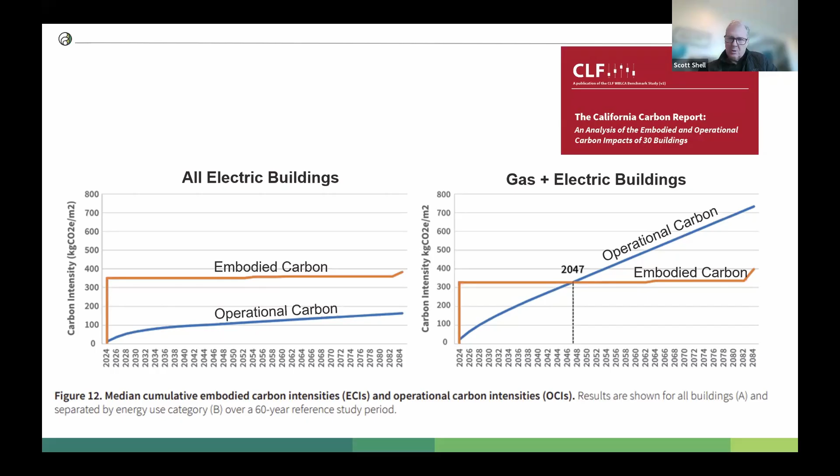So realizing this about 4 years ago, I decided to shift from a focus on architecture in general and a lot of operational carbon, specifically to the building material world. And I moved over to ClimateWorks, to the heavy industry program. So heavy industry is responsible for fully 1/3 of all global greenhouse gas emissions.

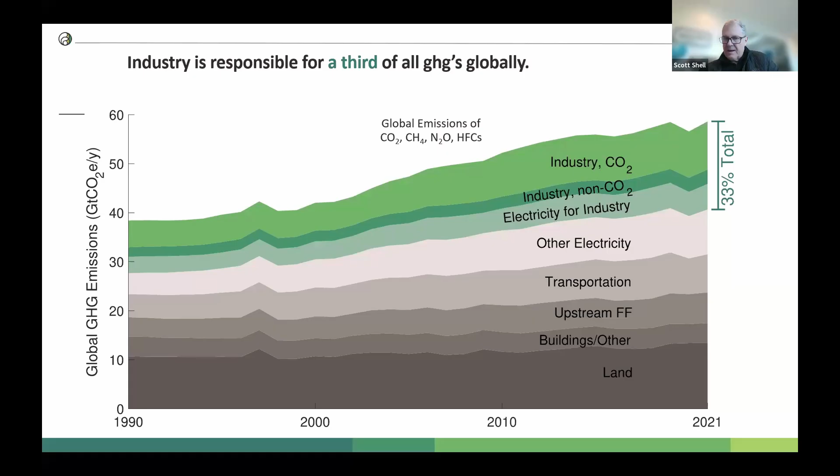It's shockingly large. Compare that to transportation down below. All forms of transportation is much smaller. It just hasn't gotten as much discussion because people thought maybe we don't know how to do it. But we actually do know how to do it, and it's time to get on with it.

Heavy industry is concentrated in a few very large sectors. Cement, steel, and chemicals are the primary sectors that we work on. When I say we, I mean both the ClimateWorks Foundation and Global Industry Hub. These are philanthropies that support other organizations to decarbonize these industries. Just cement alone is about 8% of all global CO2 emissions, almost as much as all passenger vehicles in the world. This one sector.

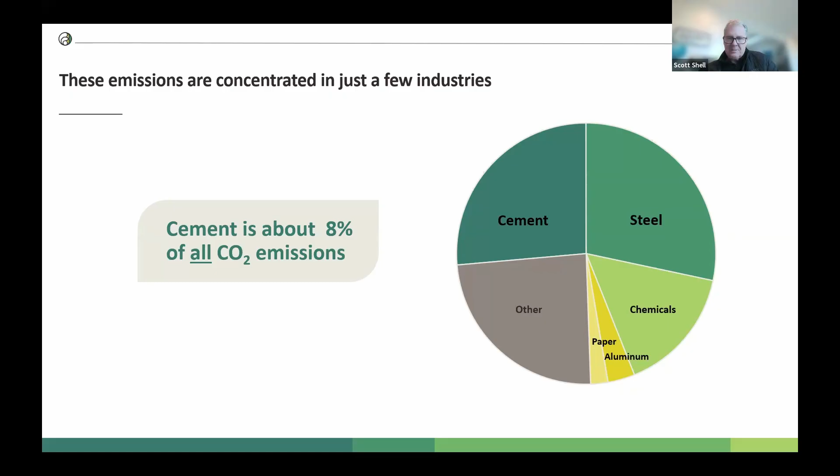So to understand how to decarbonize it, we first have to understand how cement and concrete are made. So concrete is the material that you see and that we build things out of, the sidewalks and buildings and so forth. Concrete is like Rice Krispie treats. It's a combination of aggregates and cement. Cement is like marshmallow. It holds the aggregates, the Rice Krispies, together.

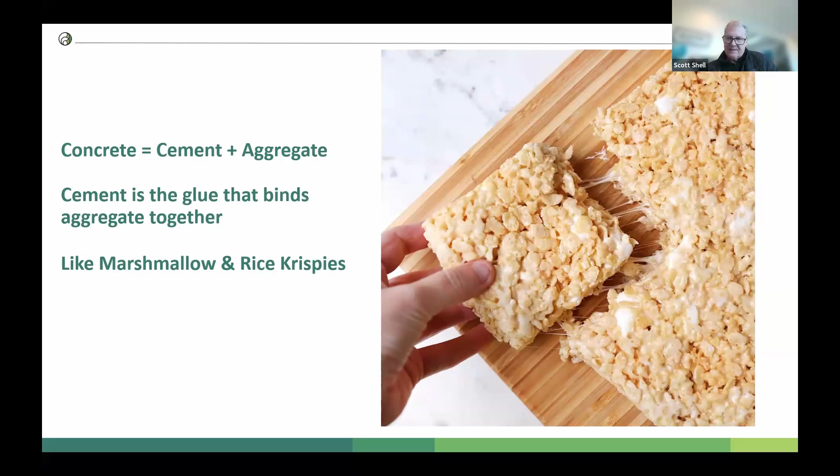This is a typical mix design for concrete. It's about half coarse aggregate, maybe 3/4 inch aggregate, and then quite a bit of sand and about 10 to 15% cement. So cement isn't that large a portion of the concrete, but it is responsible for almost 90% of the carbon emissions. So this is an area where we're really going to concentrate our efforts.

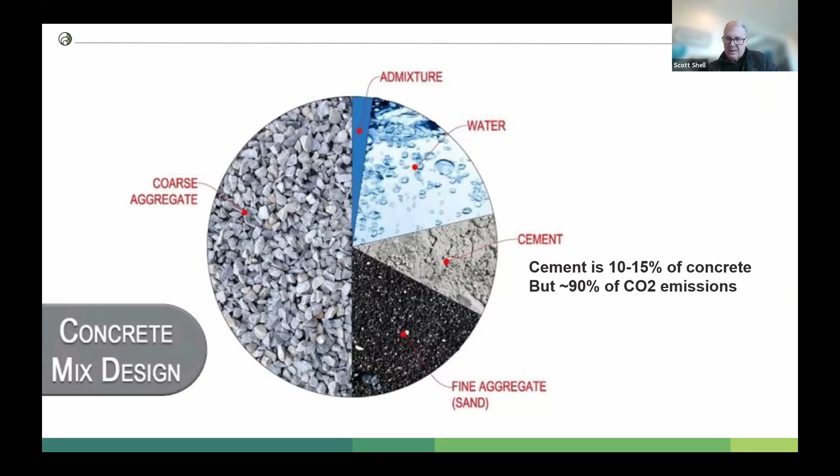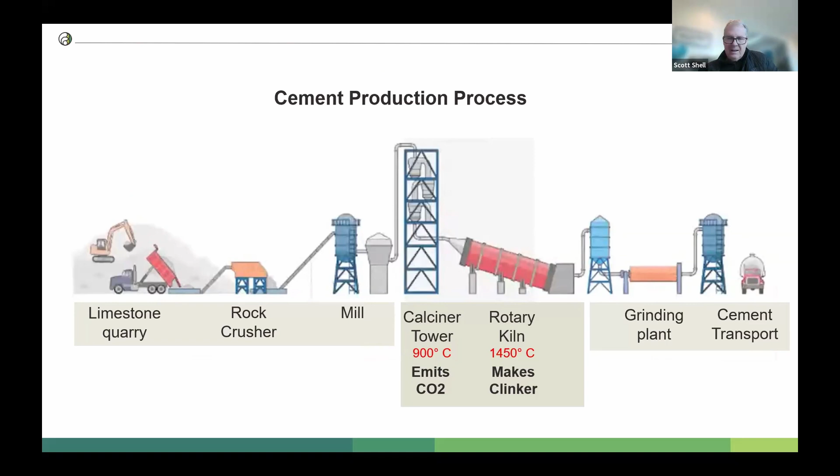So to make cement, you dig up limestone, you crush it, you mill it, you put it in a calciner tower and heat it up to about 900 degrees centigrade. That creates a calcination process, a chemical process that emits CO2. You then put that in a rotary kiln at 1450 degrees C, and that makes clinker. You grind up that clinker, and that makes cement.

So here is that process in photos. Cement plants are typically located next to a limestone quarry because they use millions of tons of it. This is the Cupertino quarry and cement plant, now closed, near Stanford.

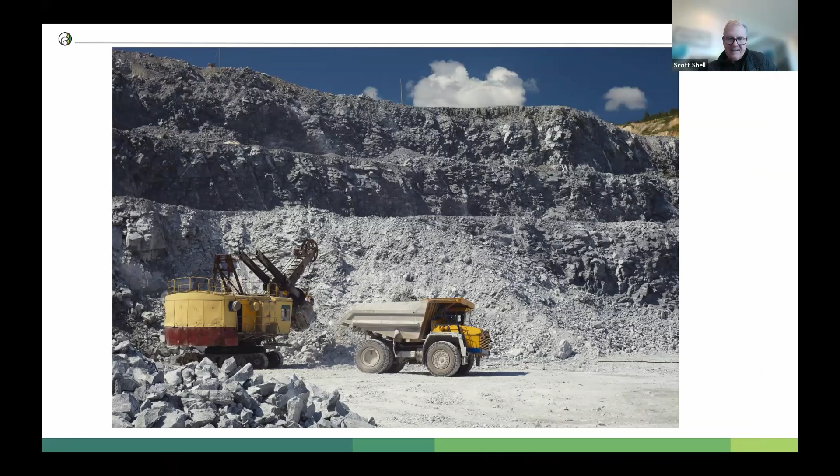They drill a bunch of holes, insert explosives, blast that. They then dig up those rocks, put it in a dump truck, take that over to a crusher, crush that up into smaller rocks. Those smaller rocks go into a grinding mill, in this case, a ball mill that's full of steel balls, and they grind up those rocks, those limestone rocks, into a fine powder like flour.

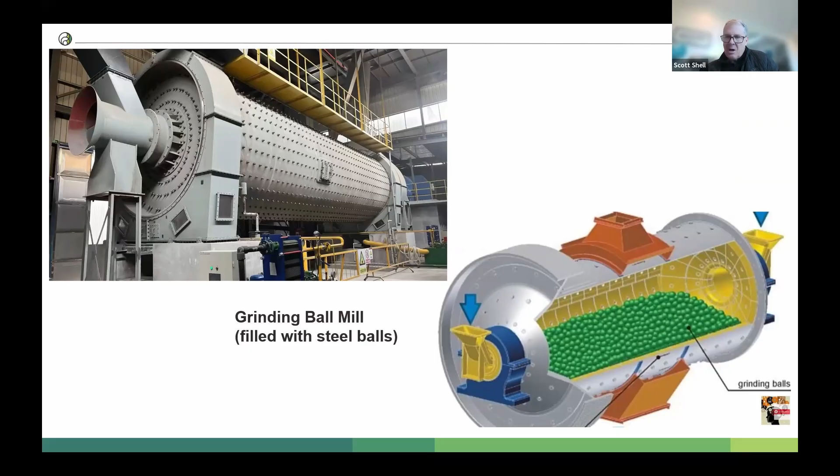That's called raw meal. That fine powder is then put in the calciner tower. This is the tall thing you're seeing here. It has a series of cyclones, and that fine powder is swirled around, and super hot air flows through that and heats up all of that limestone raw meal to create this calcination, this chemical conversion of that material.

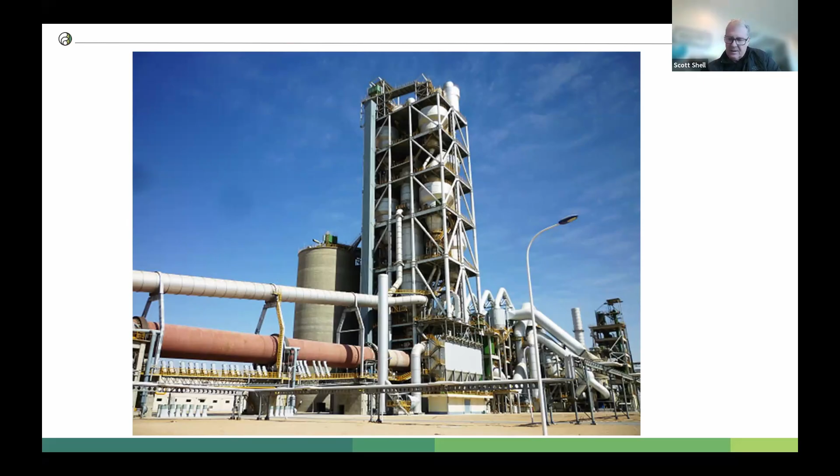That material then goes into this brown round tube, the rotary kiln that you see going off to the left. It is sloping down and to the left, and that raw meal flows through it and turns into clinker as it's formed. This is the end of that kiln. These are big things, maybe 10 or 12 feet in diameter, so you could drive a car through it. And they have an enormous burner to get this material up to these very high temperatures, much hotter than lava.

Most of the fuel for that is powdered coal or powdered pet coke, so very, very high carbon fuels. And then the clinker spills out of the bottom of the kiln there, which you see.

So you see the clinker here on the left, it's kind of these rock-like nodules. You then have to grind that clinker again to a very fine powder to make cement. You can do that in a ball mill like we saw earlier, or you can do it in a vertical mill as shown here, which is much more energy efficient.

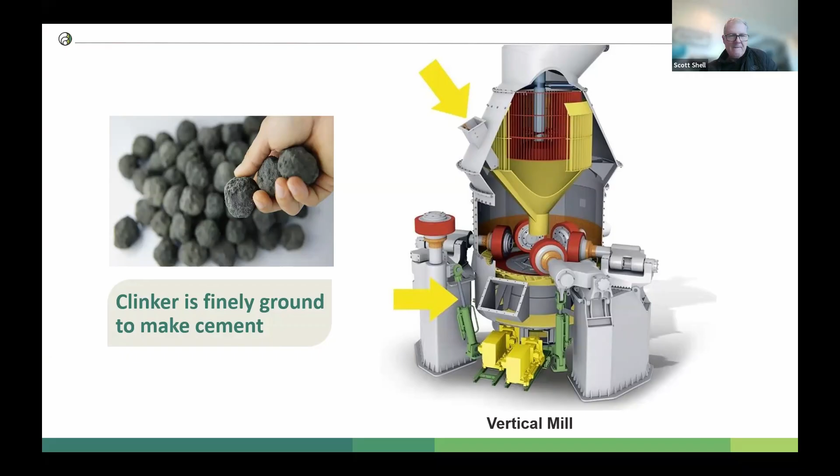Cement is made on a huge scale. A typical cement plant is 1 million tons a year or more. So that's 100 trucks like the one you see here every day. It is a big logistics business. And if you want to change it, you have to be able to work at that scale.

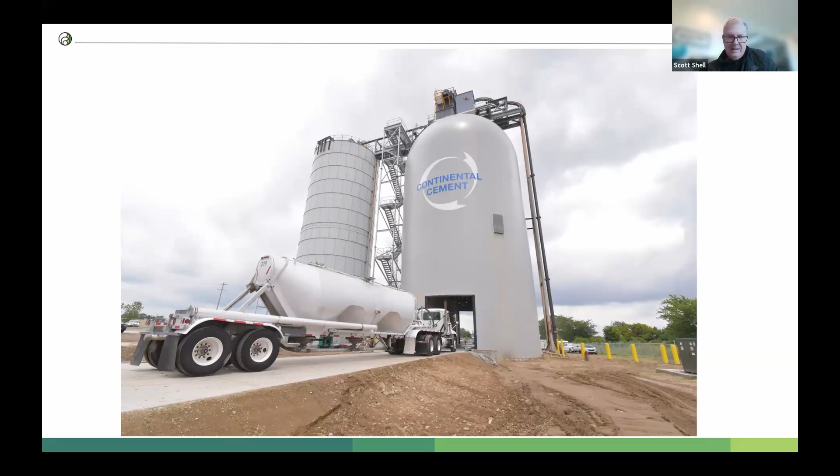So where does all the CO2 come from? You see here the CO2 numbers associated with each step of that manufacturing process. You might think it's all that mining and transportation, but no, it's actually this calcination process in the preheater and all the fossil fuel used.

Limestone is calcium carbonate. When you calcine it, it splits into lime and CO2. Almost half of the weight of that limestone is released as carbon dioxide. So picture that big old dump truck full of rocks: almost half of that weight is released as CO2 in that calciner tower. And then there's a lot of fossil fuel to get up to these very high temperatures, so that's also a very large contributor. This process emission, this chemical conversion, is over half of it. The fossil fuels are the next bit.

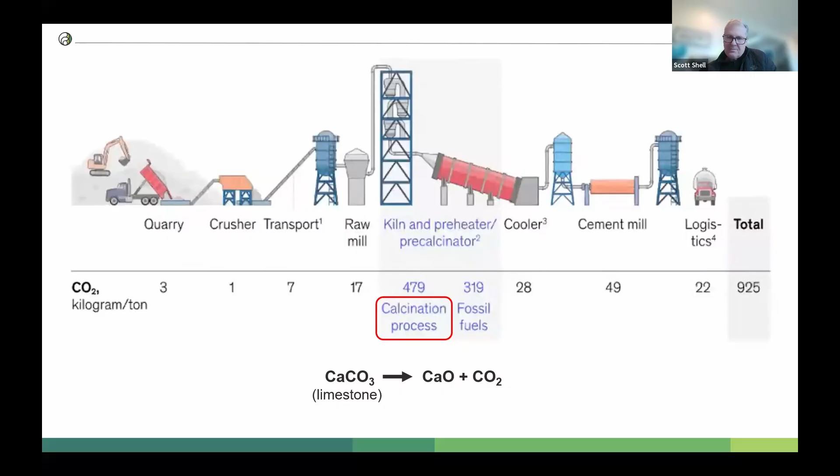The key thing is not that it's that carbon intensive as a material, it's that we use so darn much of it. We produce more concrete than any other material globally, about 30 billion tons of concrete per year. That's about 8,000 pounds for each one of us. Every person in the world consumes about 8,000 pounds of concrete per year, an astonishing number.

If you compare that to lumber, we produce less than 1 billion tons of lumber a year. So we're convinced there's no other material that can replace concrete as a building material, just because nothing else is available at this scale. So if we have to use it, how do we decarbonize it?

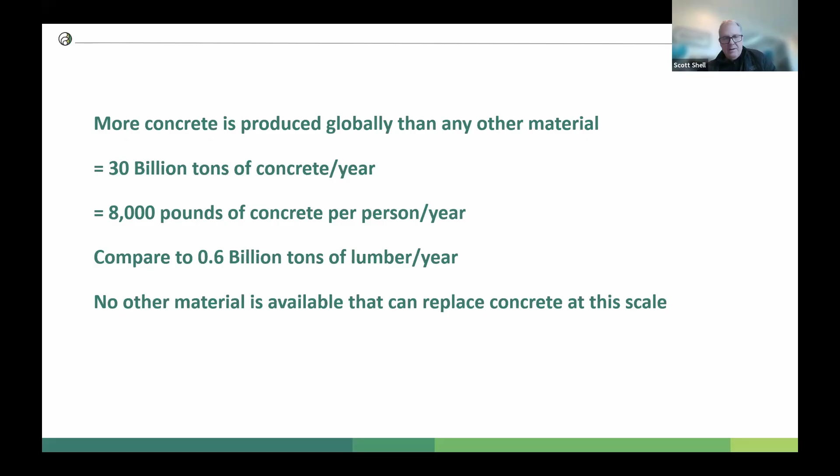So there's lots of roadmaps out there that describe pathways for decarbonizing cement. This is the roadmap from the Global Cement and Concrete Association, and they stack up a number of different strategies. The top one, the light green, is designing more efficient use of cement and concrete in our buildings. The next one is efficiency in concrete production, especially things like using mechanical mixers instead of mixing by hand. The next one, the light orange, is the one we're going to talk about mostly today: savings in cement and binders. This is using less clinker.

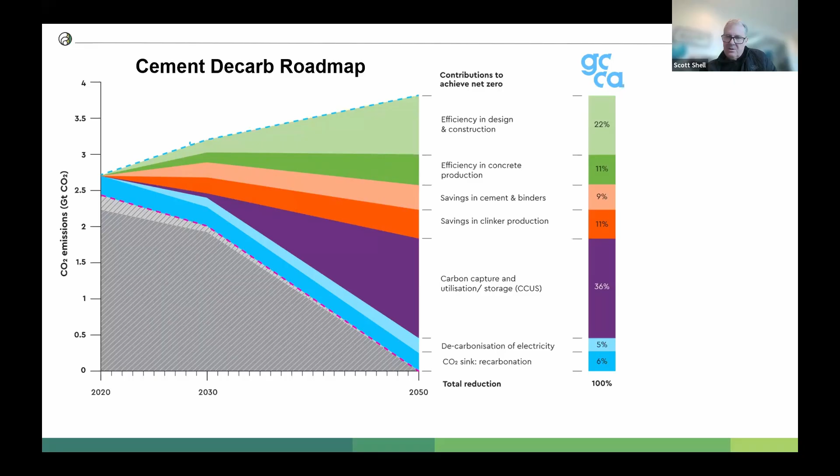The next one is basically energy efficiency, and then carbon capture. The carbon capture one, the purple one, is large here, but in our view it's by far the most expensive. So we want to shrink that down as the last strategy we use, and use all the other strategies that are more cost effective first.

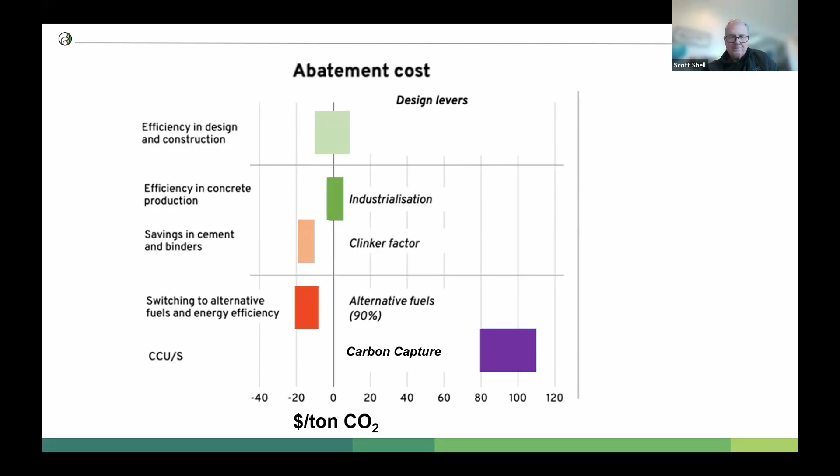What that means is ordinary Portland cement is mostly made with clinker, and you can replace some of that clinker with something called supplementary cementitious materials, SCMs.

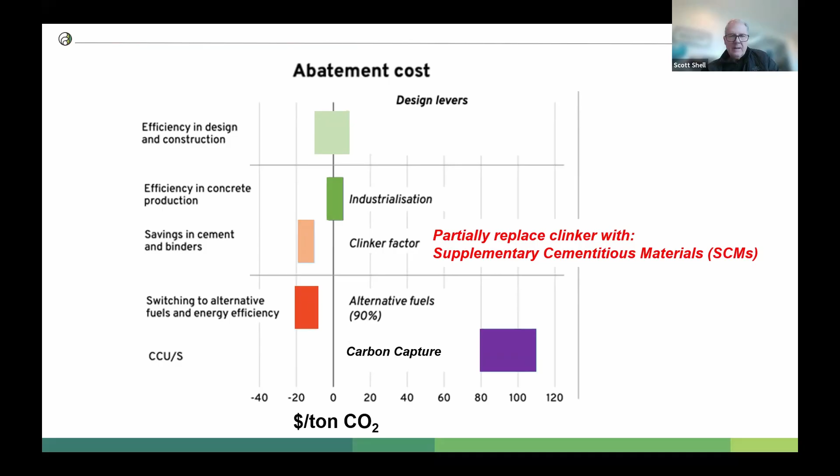The SCMs that you hear mostly about are fly ash and slag. Both of these are dependent on coal power. Fly ash is the ash emitted from generating electricity from coal power plants, and slag is a byproduct of producing steel in a blast furnace.

So these materials work well as SCMs, but they are from coal, and we are phasing out those coal industries. We're working hard to get rid of those, and so those materials are declining. In fact, it's already getting hard to get some of these materials.

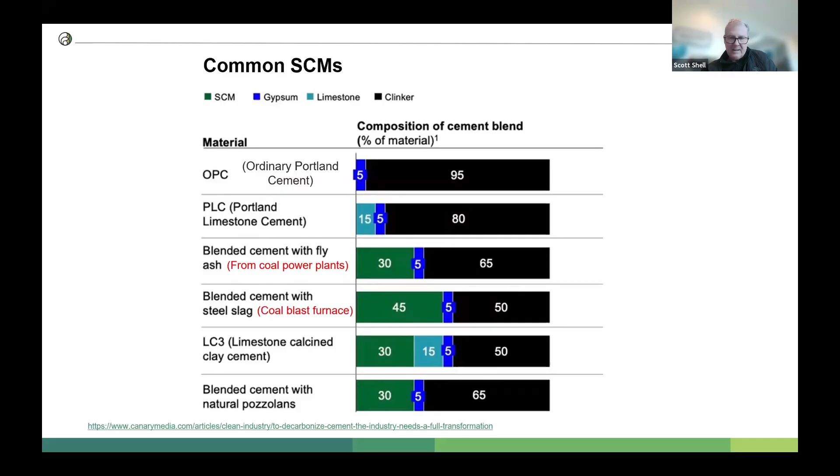There's another challenge with these SCMs: they're just not available in large enough quantities. We make over 4 billion tons of Portland cement globally every year, and there's only about 8% or 10% as much fly ash or slag as there is cement. So it can never replace Portland cement or clinker at a high level on a global basis in those blended cements.

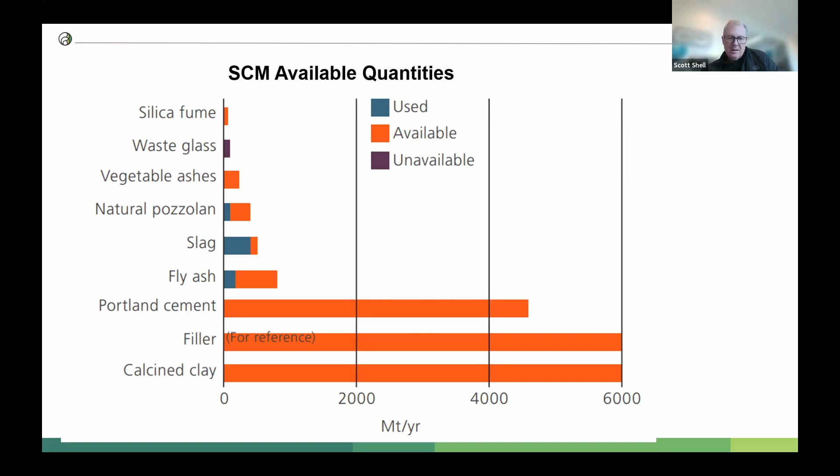The bottom line, however, you'll see calcined clay. Clay is one of the most common minerals on earth. It's broadly available around the world, so it's near where you need it. We think that is the globally scalable solution. Now, we still support using these other ones while we have them, but we need to prepare for the future and for today, where we can get to much higher clinker replacement levels with these supplementary cementitious materials.

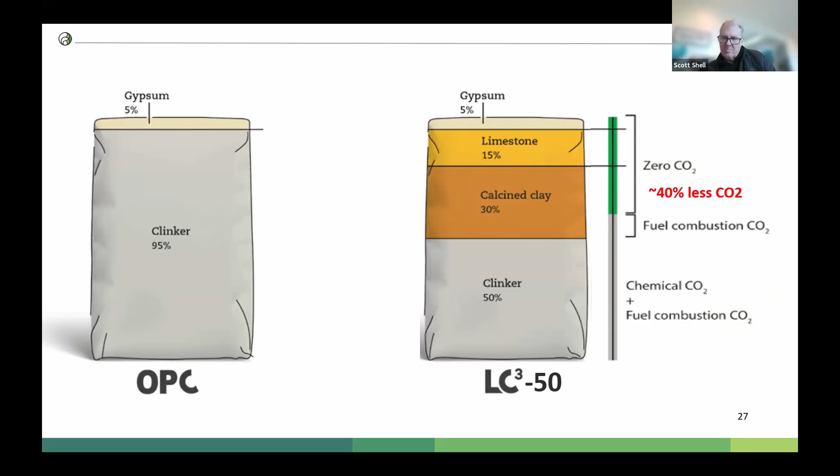Now, this is not limestone that goes through the kiln, it's just ground up, so it's very low carbon. In both of them, there's about 5% gypsum added to control the set time. With LC350, there's still some fuel used to calcine the clay, so instead of getting a 50% reduction, you get about a 40% reduction in CO2 emissions.

There is, however, continued progress on increasing the amount of calcined clay and lowering the clinker content. LC335, with 35% clinker, is now a code-approved material in some jurisdictions and is being produced in a few plants globally. So this is really driving down the carbon emissions of this blended cement.

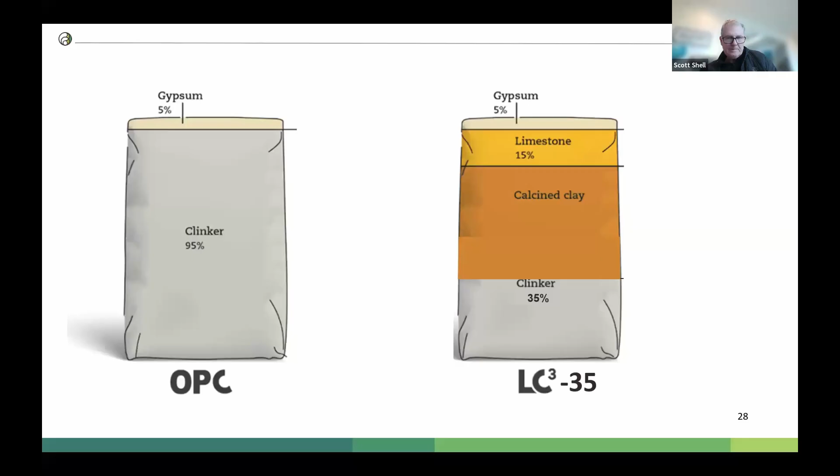You calcine clay at a much lower temperature, about 800 degrees, than clinker, which is about 1450 degrees. So your fuel costs go way down, about a third the cost of the cement, making the calcined clay much more affordable to produce. Retrofitting existing kilns is one of the most cost-effective ways to produce a plant. There are actually quite a few excess kilns around the world, with a lot of excess cement production capacity in China, Southeast Asia, and some other places, so there are kilns that could be retrofit to produce this.

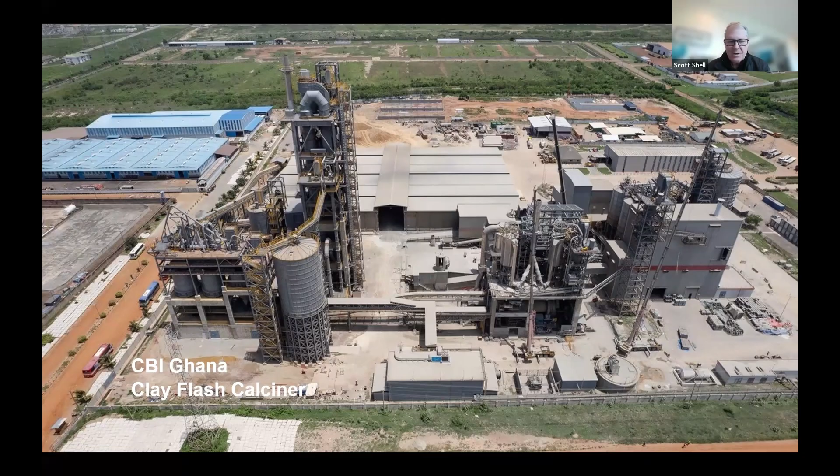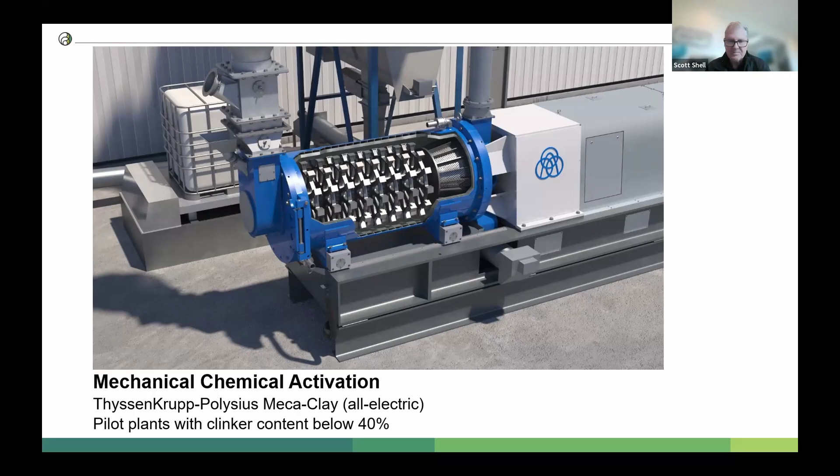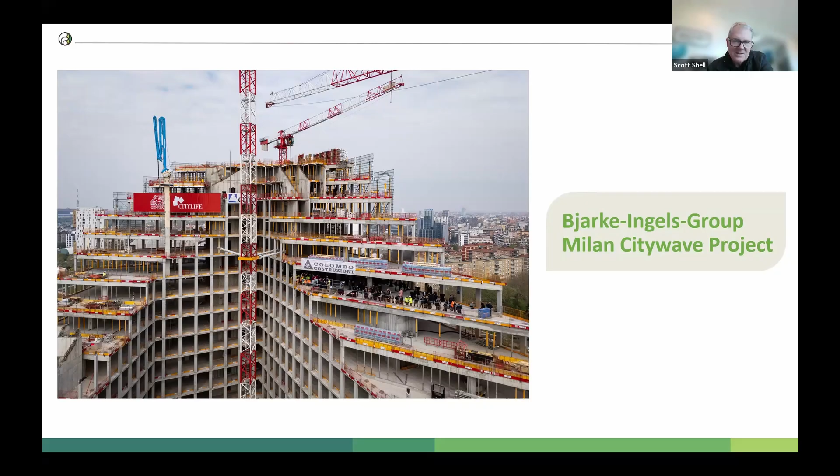We're now seeing some exciting big new projects built using the LC3 material. For those architects in the group, you know BIG Group, Bjarke Ingels Group, this is the Milan Citywave project that's under construction, obviously a major high-rise project. In Lausanne, Switzerland, the city where EPFL University is located and where the LC3 research team is based, this Tilia Tower has now topped out. I'll get to go see that here in another month or so. So again, a major high-rise project.

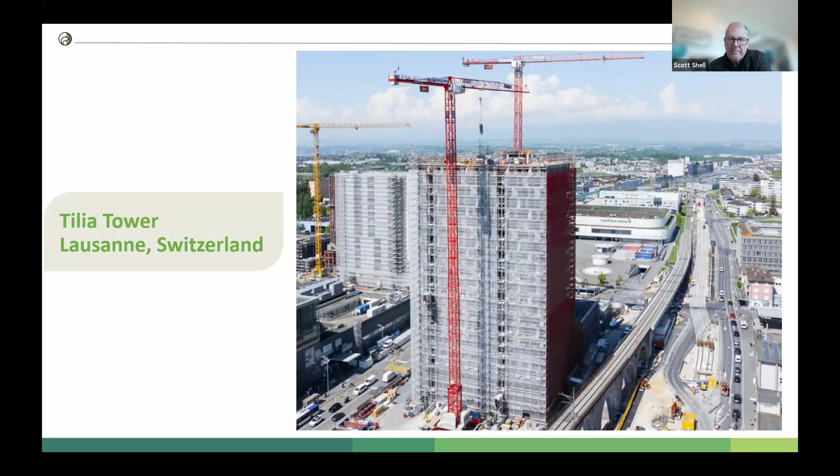One of the great characteristics of LC3 is that it significantly improves durability. This is actually true of many SCMs, that they make a better concrete.

This also makes the concrete less pervious, so less water can get into it. One of the primary mechanisms for degrading concrete is water getting into it through perviousness or cracks, degrading the rebar. That rebar then rusts and expands and cracks the concrete.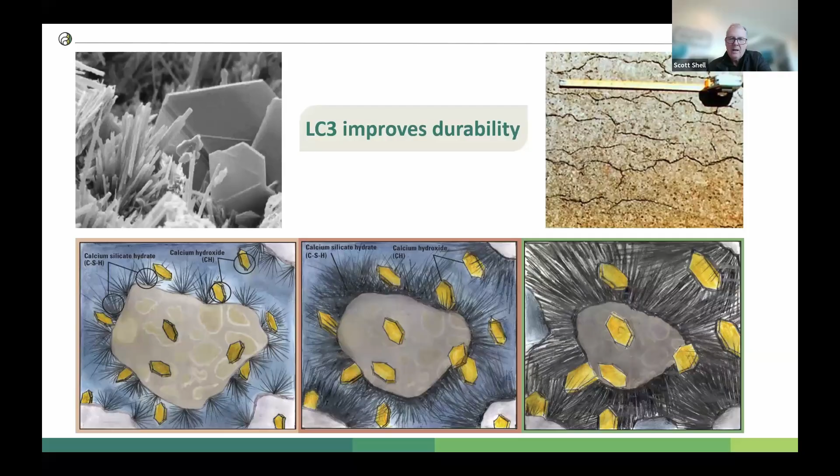Obviously, if you're going to pave a highway with something, you have to be darn sure it's going to work. So there's a lot of testing and verification going on.

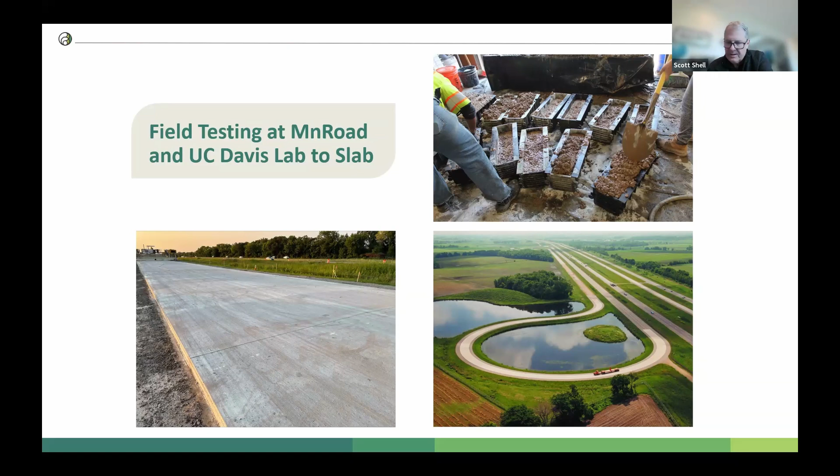In the upper right, you're seeing some of the testing from a similar facility, although not as large, at the University of California at Davis. They have a lab to slab program - an extensive research lab there, but they also build slabs and run heavily loaded trucks over it to demonstrate it in the field. They've been doing a lot of field testing and verification for LC3 recently. All of this testing and verification is to ensure good performance for these materials that are new to the market.

I'd like to talk a little bit about where cement is consumed, because this has a lot to do with the strategies we use to roll out these new materials.

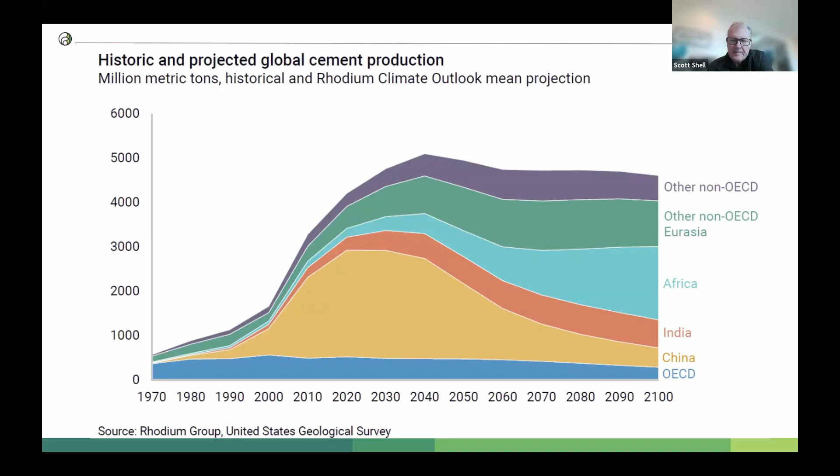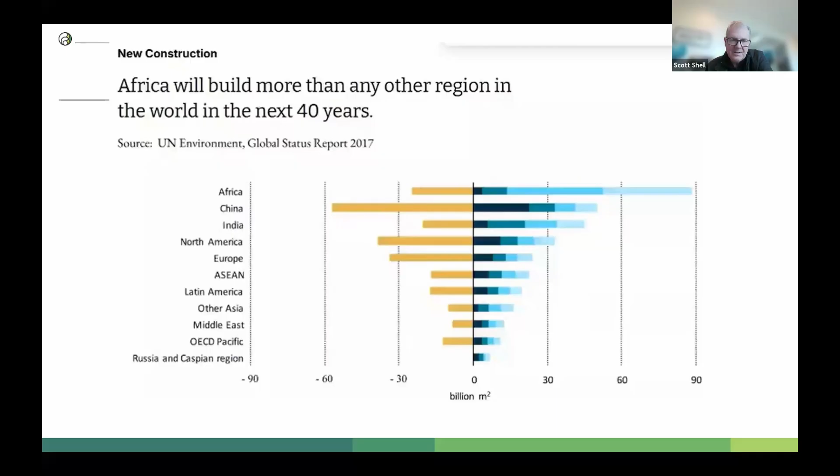Shown another way, here's where projected floor area is for the next 40 years. Africa dominates—very large population, early in their development cycle, so lots of people still moving into cities, building their housing, roads and infrastructure for the first time. China and India are next biggest, and we really need to understand how to solve this problem in these economies.

We want to develop a new type of cement plant, these LC3 plants, that are much more advanced, efficient, lower cost, more durable, and lower carbon, before we build out a new generation of these existing type of clinker plants. So that's a lot of what our grant making is focused on.

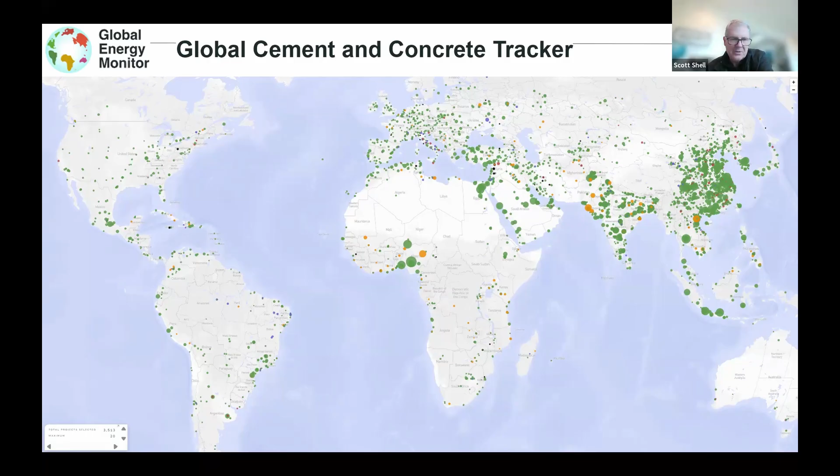Why is that? One of the reasons is that in a lot of these geographies, they don't have good limestone reserves. We were recently in Ghana visiting their plant, and they have essentially no limestone in Ghana. So they are having to import clinker using hard currency from places like Morocco, Turkey, or Egypt. It's very expensive for them for a basic material that you need to build your economy on. So they're very happy to use a local material, and clay is widely available around the world, especially in the global south.

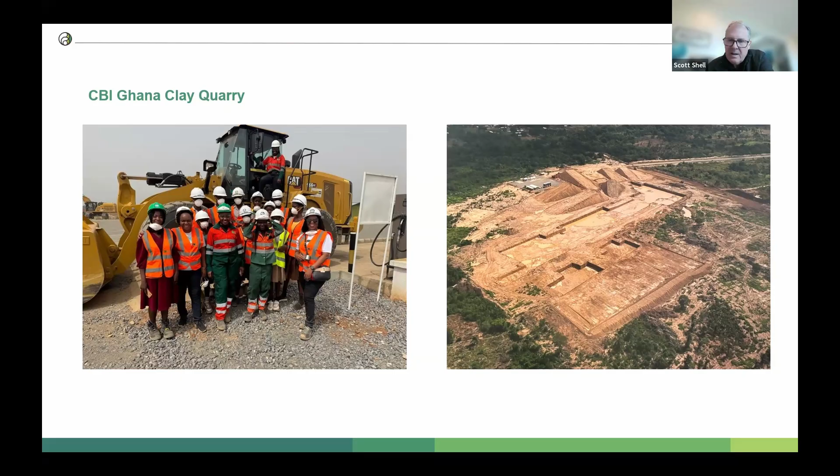That plant we visited in Ghana is CBI Ghana. This is their clay quarry—they developed this quarry and created a bunch of good new jobs there. The village located adjacent to it had very few jobs, so now they've got a great new source of income, quarrying it and driving the clay to the cement plant.

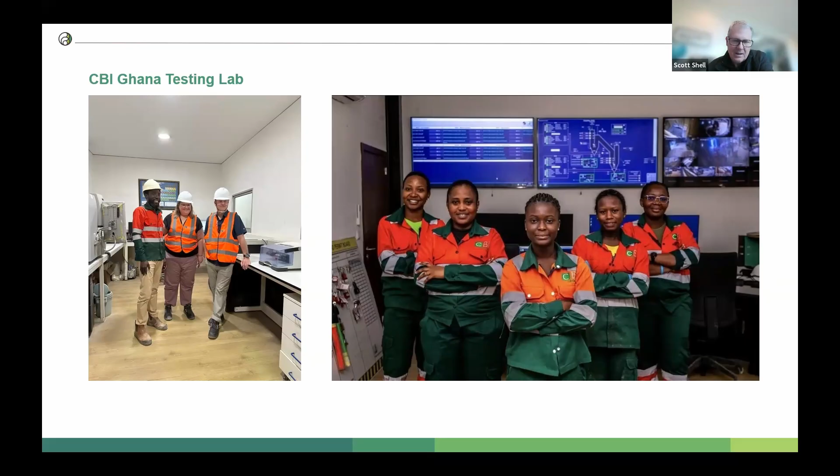But most of the concrete in these emerging economies is not ready-mix concrete. Ready-mix concrete is typically served with bulk cement in trucks. Most of the market in these economies is in bags of cement that's mixed on site, either in a small mechanical mixer like you might see for laying brick, or by hand on the ground. In these methods, it's much harder to control the quality.

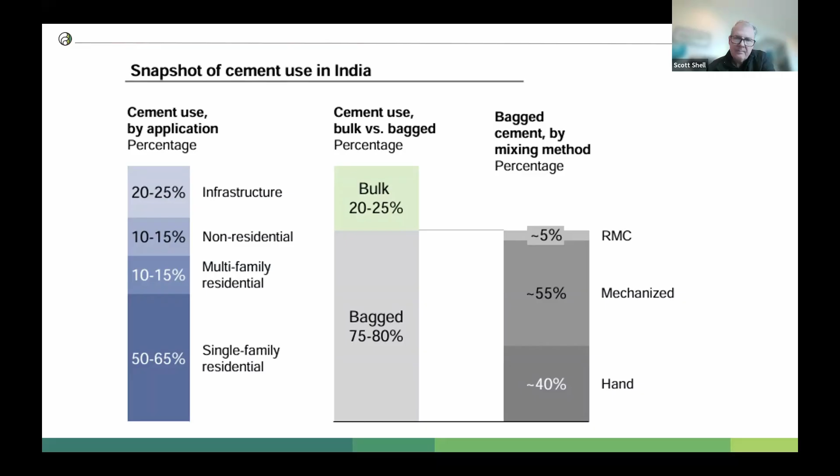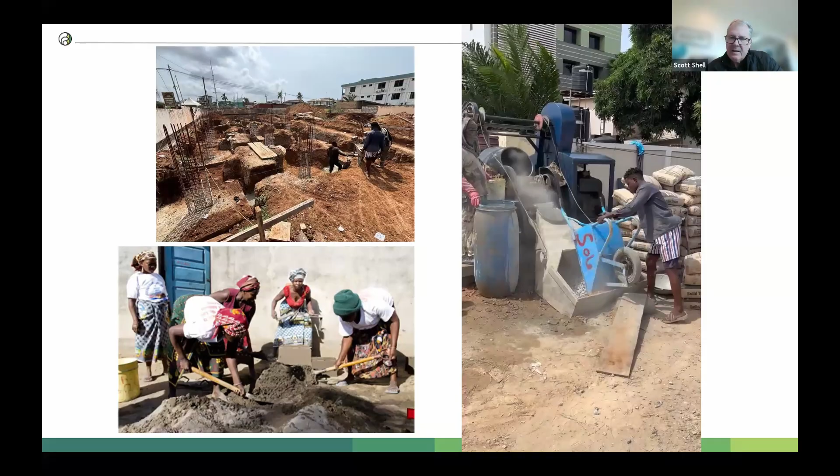So here is a look at those 2 methods. On the bottom left, you have hand mixing concrete. They'll take 1 bucket of cement, 2 buckets of sand, and 4 buckets of aggregate, something like that, and mix it up. On the right, you'll see mechanical mixing. They'll dump in 2 wheelbarrows full of aggregate, then a wheelbarrow full of sand, then a bag of cement. So again, there's not the precision or accuracy of measurement.

That tends to lead to more cement use. This also happens on bigger projects, much bigger than you would expect. This is a 10 or 12-story high-rise that we drove past, and you'll see piles of cement, bags of cement, piles of sand, and piles of aggregate. These workers will carry that aggregate and sand over to a mixer by hand, cut open a bag and pour it in, and mix it up in a portable mixer.

Since you can't control the concrete mix very precisely, what is in that bag is super important. That's why we are big fans of LC3, because that is a very low carbon cement that can go in that bag and still produce a very strong and durable concrete.

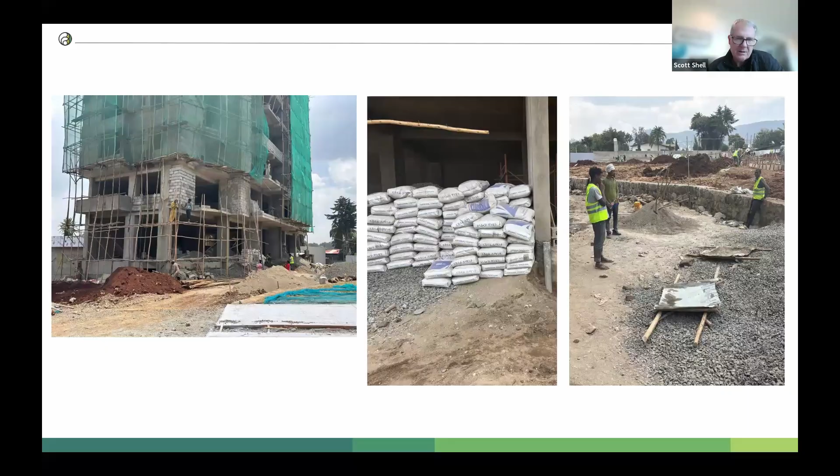One of the other main uses of cement is to make concrete blocks, used for a lot of walls, and in low-rise construction a lot of times the concrete block will be the structure. These could consume a very large percentage of the cement in a country. Here you see them on the left, making one block at a time. These are solid blocks, and most of the concrete blocks we are all familiar with are hollow.

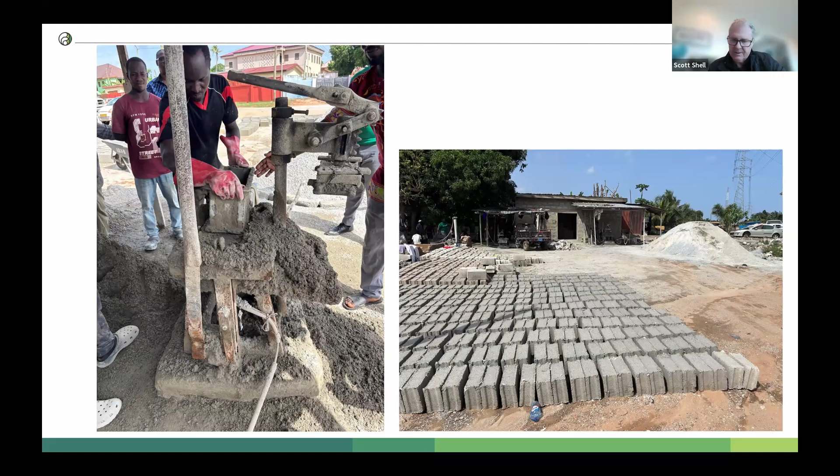There is some very exciting progress happening here. A former postdoc at EPFL in Switzerland, Dr. Alice Bakera, is returning to her faculty position in Tanzania at the University of Dar es Salaam, and she's also starting a low carbon concrete block production.

If you look in this chart, you'll see that fired clay bricks are actually very, very high carbon. Then you'll see solid concrete blocks, which are next. By making them hollow, you reduce the amount of cement required. And then she starts adjusting the cement mix, including using LC3 50% and LC3 35%. So there's a dramatic reduction in the greenhouse gas emissions for these more efficient blocks.

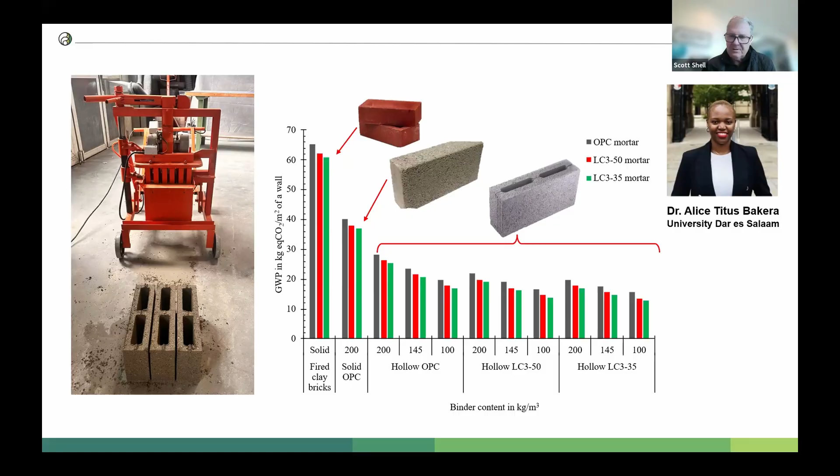Why is the term clinker used in place of Portland cement when you discuss the LC3 blend? It's my understanding that the clinker is the raw, bulky material that comes directly out of the kiln, and the cement is the processed material that is used in the LC3 blend.

It's a good question. The clinker is the material that comes out; you grind that up, and then you make cement. Cement actually does have other ingredients in it, primarily gypsum to control the set. And then a lot of people refer to blended cements as cement. So in India, for example, the SCMs are mixed with the Portland cement and ground clinker at the cement plant and put in the bags. So it's a detail, but that's how it works.

Okay. Your first slide about net zero building, can you talk more about how you cut down to real zero carbon?

So that was on the operational energy side. We didn't get to zero carbon on the material side, we're not able to do that yet. That used a bunch of energy efficiency strategies, things like very efficient mechanical cooling and ventilation systems, extensive daylighting and controls to turn the lights off when there's enough light, really good insulation, all electric, as I mentioned. And then the roof is covered with solar panels that generate as much electricity as it uses over the course of a year. We did specify a lot of low carbon concrete on the project, and we used wood framing for interior partitions and things of that sort.